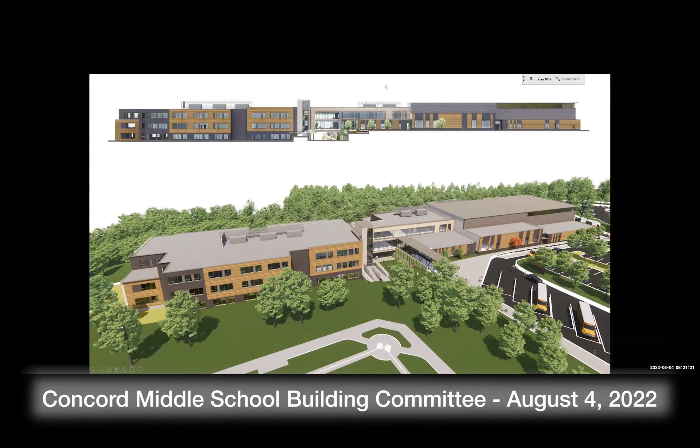All right, and so our next—sorry, Lorraine, do you have an image? I hate to ask at this time, but do you have what it was going to look like, what the form liner was going to be that we're giving up if we were to accept that? I don't have a close-up—let me just see if I do. Yes, I do. Okay, sorry, Sue.

Oh, I don't see it. Okay, it's right.

Right here, Steve, it was sort of using that rivery effect again. It's like water, you might see it in a horizontal feature, very water-like. We used it in a vertical feature here, and this looks horizontal on this side. It's just to create a little relief and diversity, so you're not looking at a flat wall like you'd get with the smooth panel.

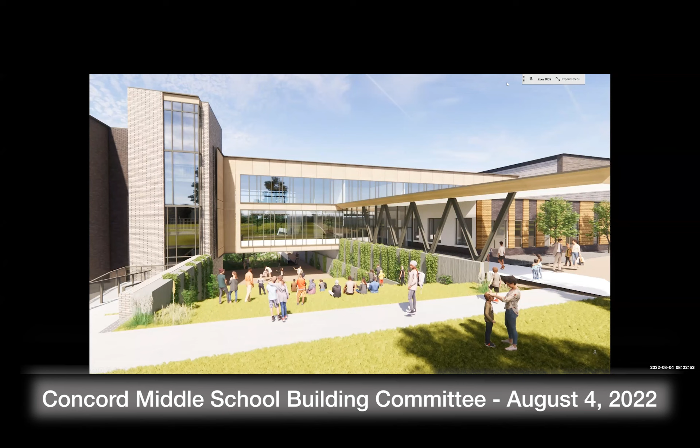All right, Sue, back to you.

All right, the next item was the site wood bridge. As Steve mentioned, the site wood bridge is at the back of the site, connected with the walkway in the back. So when you came down that sloped walkway, as Mike will correct me, we made an immediate connection over to the lower level classroom and outdoor learning.

So Sue, if you don't mind, I'm going to share my screen. I might just pull up the log after this, so you don't have to keep doing that.

Here's the dining commons, here's the sloped walkway, and here is where that wood bridge connects, because we're above grade, so we're spanning over the grade to connect. If the wood bridge goes away and the walkway stays, you'll go underneath the bridge crossing until you hit back at grade and can come back around. So it was a feature to make that crossing, and you're elevated when you do that, bringing you to this outdoor learning environment.

Okay, I'm just going to bring up.

Can I ask, if these two items, the sloped walkway and the bridge, if we were to say we can deal with this, we can do without it - but conditions change - are these things that can be added in after 60%? Can we retrieve them if conditions change?

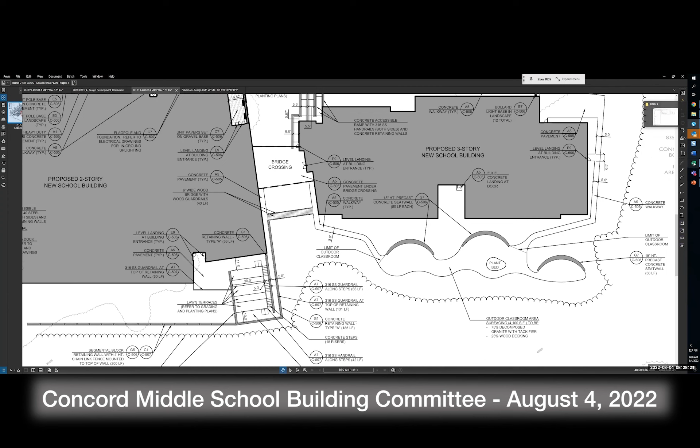So it is effort. We typically have alternates on projects, but I will say that when it comes to having those discussions, I will have a strong voice on what is a lot of effort versus what is a little effort. We can talk that through. That's helpful. This would be a challenging one, but not the simplest. Just want to let people know that could be part of this discussion. It's another layer as we're thinking about what we definitively would consider taking out, what we feel strongly should be in, and what we can do to try and keep given the budget constraints. There are just different ways to think about it.

I'm just going to hide these to try and make this more like Sue's, which was as big as she possibly could make it. Just to make it easy for you guys.

Okay, so that was the wood bridge. The next item was overflow roof drainage. This is a hard one to explain to people sometimes. Every building that we design, every school project, is required, and other buildings are required, to have a backup system in case your internal roof drain clogs and fails.

So on a house, you have gutters on the outside, and you only have one, because if the gutter clogs, it'll overflow the gutter and still come out. When you use a low slope roof, such as most of our school buildings, you have internal gutters with rain leaders that come inside the building, go under the slab, and to a drainage system. If that roof drain clogs, you could have significant damage both to your roof, because there's a certain amount of water it can hold, as well as internal damage if a pipe breaks.

So the code requires that we have a secondary roof drain. It's called an overflow. In some cases, it's the same part of the same roof drain, just higher. So if the water builds up, it goes through that secondary hole, but it needs an independent piping system, because that's the whole point—if it gets clogged, it can still come out. So you're paying for the more expensive roof drain body, and you're also paying for basically a second level of piping inside the building.

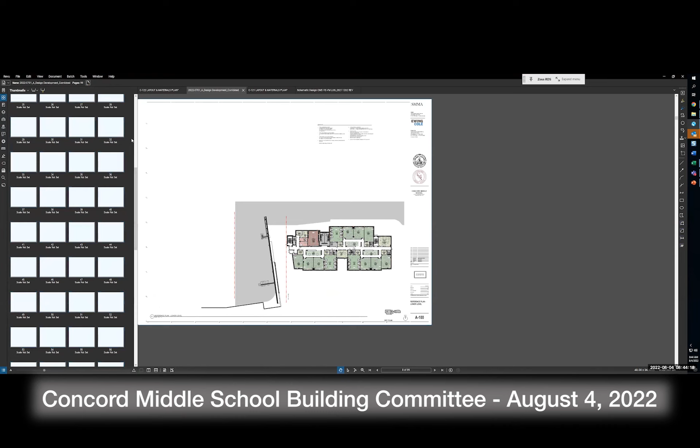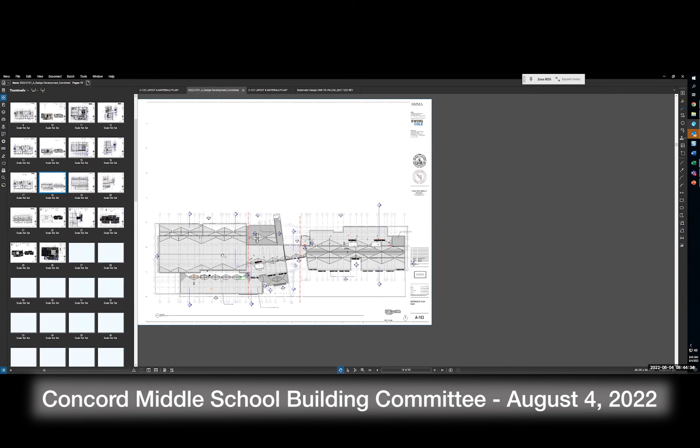With this one, something we noticed in the design was that the gym and auditorium units ended up right next to each other on the roof. Talking with manufacturers as we were getting cost estimates in, the cost of mechanical equipment has definitely gone up. These particular units have gone up pretty substantially, partly because one other thing we did to these units was get rid of the roof screens, something we talked about earlier as a value.

So we put on some sound attenuation — they're on the left side of this plan, the orange and green boxes, I'm not sure why they're different colors. Talking to the manufacturer, when they're currently at the 4,000 and 5,000 CFM marks, they don't have the economies of scale that you'd get with a 9,000 CFM unit. So you're able to have savings by eliminating the curb, eliminating a lot of metal, while still having the same fans.

On these, you don't have to have 4 sound attenuators — you can now drop down to 2. So there are a number of savings just by moving to 1 unit. Now the obvious question becomes: well, the gym and the auditorium are different uses. From a HVAC standpoint, they actually have more similar outside air quantities, so it's going to end up as about a 70 to 75% outside air unit.

We're also looking at putting needlepoint ionization on the units, which should help reduce any smells, in addition to having a large amount of dilution. So we're not worried about smells crossing from the gym to the auditorium, or vice versa. That was a bit of the mechanical side.

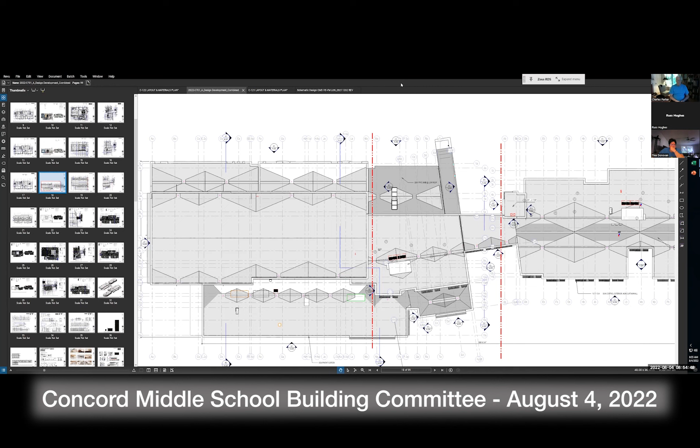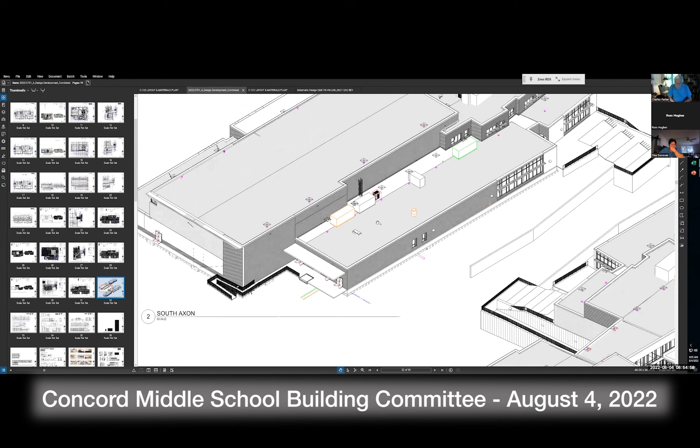We have MERV 13 filters, and we're also putting in needlepoint ionization, which introduces ions but also reduces smells and odors. We're doing things that will eliminate that anyway from an air quality standpoint, because we like what it does for improving air quality in the space, but it has the added benefit of reducing the odor problem as well.

Okay, yeah, I've never heard of that needlepoint ionization. I've heard of carbon filters that help remove odors, but okay. Yeah, I can send you some literature on that.

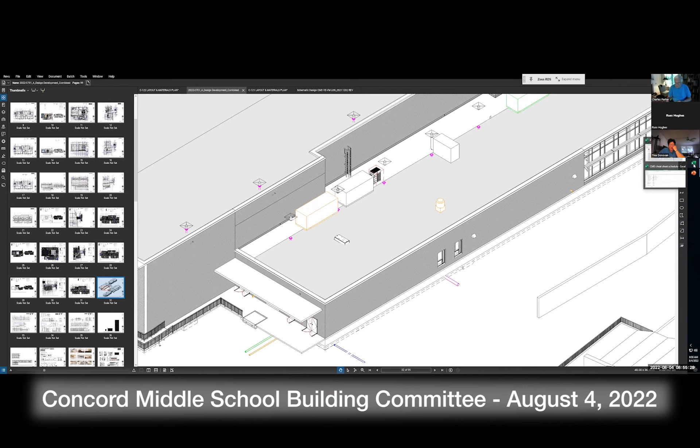Great, any other questions on that? Do we want to hold till the end, since Charlie suggested we move this forward today? I'm wondering if we get through the rest of the accepted items and then see if there's anything we're ready to move forward on today - this one seems to make some sense.

Yeah, okay great. All right, the next one is replacing exposed corridor ceilings with ACT. Jump to one of the interior elevations here to give you a sense - if you remember, this is an example of where that occurs at the team commons. We had the exposed ceiling in this one area.

This is ACT, acoustic ceiling tile, like above my desk right now and above Steve's and others. But the idea here was to create a different dynamic as they're walking through the corridor - they start to see how buildings are put together. We often do this as a teaching tool so students can understand services, HVAC, electrical and plumbing as they go about their day in school.

So we put K13, which is a spray acoustic material, on the deck, because that can be very noisy otherwise. It helps reduce some sound transmission, particularly outside some classrooms. There's a cost to it - it costs more than regular ceiling tile, so the savings there was about $32,000. It's not huge but it is something, so we did put that on there.

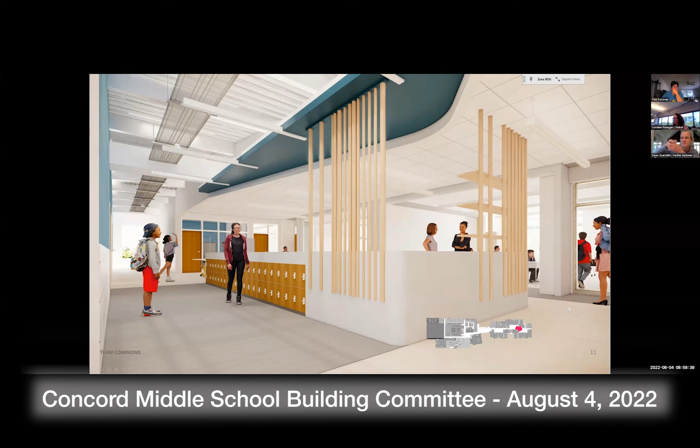I have a question on both, if Russ is thinking about anything related to that. The K13, I never love what that looks and feels like. Just so everyone knows, it kind of looks like spray-on, I don't know how to describe it. Popcorn, yeah, it's like you can sort of see it there. That's wire management, right, that gray. Yeah, but here it's on the deck, so it's almost like not a popcorn ceiling, but like the look and feel of when you see a piece of steel that's been fireproofed. Looks like gunite. Yeah.

Would you paint that? So we typically would do a white. Okay, because you can get it in colors. Yeah, so usually it's gray. In my office it's like a neutral gray.

Anyway, with the ceiling, my question - I'm leading up to a question, I promise. The ceiling, you have a differential, so you had the deck which is sprayed, then you had a soffit, and then you had the ACT, and it looks like there's some sort of axiom trim there. Would the ACT be at the same level? Would it just be flat, or would it still be high? Would you have the ability to differ the ceiling heights is my question. Yeah, I think we'd want to maintain a little bit of difference there as you move through the corridor. Whether we'd end up with that detail with the axiom and that amount of soffit, we'd have to analyze that and see what looks best.

There's something nice about the variety here that gives the corridor a little more interest than just a flat ACT with 2x4 lights as an example, or 2x2 lights. We want to create a difference between the team commons and the corridor, we want to give that its own space.

I just wanted to point out with the epoxy, sometimes it's the Department of Public Health that weighs in and has dictated why, and we definitely hear the same thing about the mops. Like Lorraine said, there's a texture to it that could rip things up, especially a wet mop. But sometimes we've had the local Department of Public Health say they don't want all those joints in the Quarry Tile, they want us to do a poured epoxy because it's basically an integral base that gets poured in and there's no jointing, so there's nowhere for bacteria and things to live and grow.

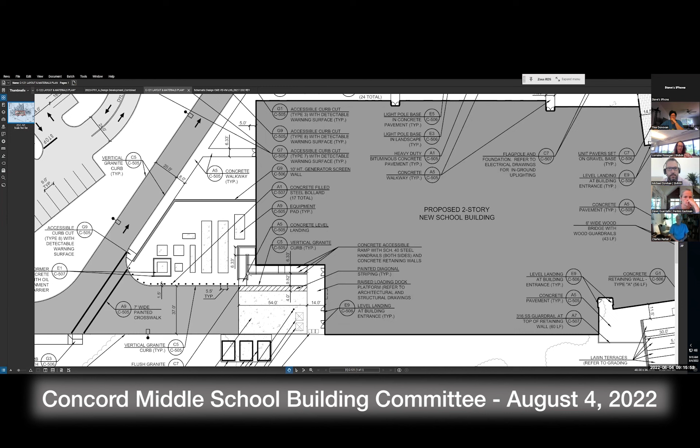We do have concrete filled ones at the back of the house by the loading dock - we use them in the utility yard, so to speak. But when they're out front, we try to go with a nicer appearance. I mean, there's a lot of them - how many are there? 69? 59? 69. 69.

69? Ooh, that's a lot at a thousand dollars a piece. Because we have a double bus drop off. How does that second one work - they drive over that walkway? Yes, the walkway is flush through there. That's the reason for the bollards, because the paver walkway is flush with the road. Right, so you need a separation. We always develop our drop offs as a flush condition, not a 6-inch reveal curb condition.

Steve, do you still have a question? Sort of - to all of these, we're just discussing for further consideration. There are 3 options here: galvanized, stainless steel cover, I guess a 4th option with painted, and then granite. I don't know how that's going to proceed, but I don't think we've come to a final decision. The cost is for galvanized, as I understand it, so if we wanted to consider one of the others, we'd need to ask the cost estimators to provide savings for those alternatives. Is that correct, Lorraine? Yes, that's correct.

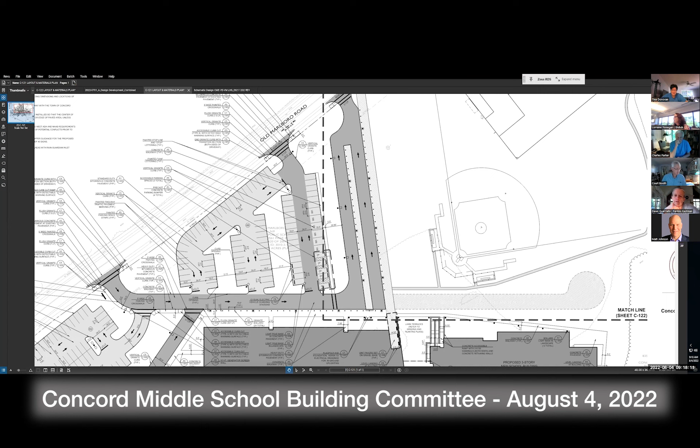I don't know what happened to my text here. That's weird. For the gym, the reconciled value is 1.2 million—I think we had 2 million as a ballpark. For the auditorium, it's 670,000, and we had 1 million. So those are the two numbers that changed in the revised VE log that went out, based on feedback from the estimators.

Before you get to those, we had a blank under the ceiling height for the gym. I don't know whether you want to discuss that now, but it's on here. So, sorry, we did get a price for that—it's $104,000. We had it in the reject column for right now.

But yes, if we reduce the height of the gymnasium by approximately 5 feet, we would still be within regulation for MIAA basketball. Coming out of SD we didn't have all our steel sized or all our duct runs, so we maintained a certain height. Now that we're in DD, we finalized the size of the joists in the gym and have more clarity on the duct runs. We got the clearance required by MIAA, and it would allow us to reduce the height of the gym. Currently the design has the auditorium and gym roof at the same elevation.

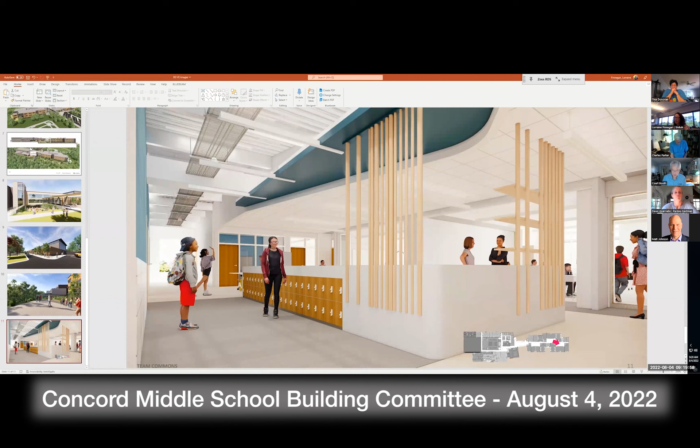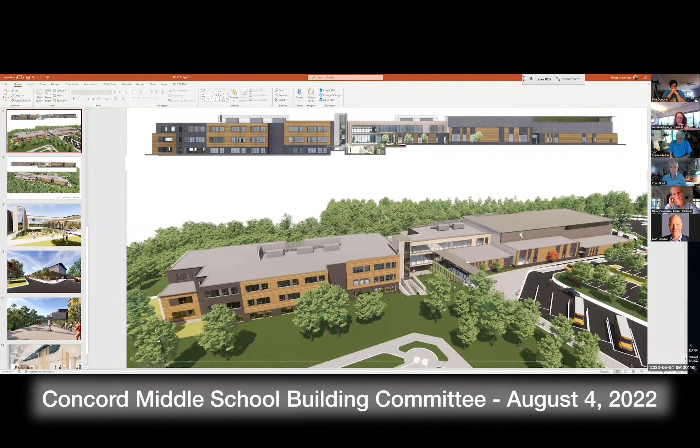This one—so we would end up dropping this down, and these two roofs would become disconnected. We'd drop this down because we need to maintain the clearance in the auditorium for the fly loft. But that would result in a savings of approximately $104,000.

So we can discuss that when we come back to look at all the rejects. We don't need to discuss that now.

Absolutely, yep. So what we had recommended was a $2 million list, and I know not everybody was in favor of everything on here today. There were a few here that we'd be very grateful if we could move the dime on, just from a detailing perspective—if some of the simpler ones could move. Lorraine, I was going to recap it, but do you want to speak to which ones might be able to move forward and decide on now, in the interest of sending direction so you're not drawing it twice?

Yeah, I'd love to. The 17A, the interior light shelf, which is $122,000. I think the mechanical—where am I? I haven't gotten there yet. Did I get there? I haven't gotten there yet.

I was just going in off of memory. Yep, the three insulations, 47, 48, and 49, we'd love to move on. The AHU at the gymnasium, if it's there, that'd be great, number 53. If 55, the floor tile and epoxy, is an easy one for you, we'll get in touch with the Board of Health and just move that. And then 61, I'd love to take the concrete slab because of the detailing if possible.